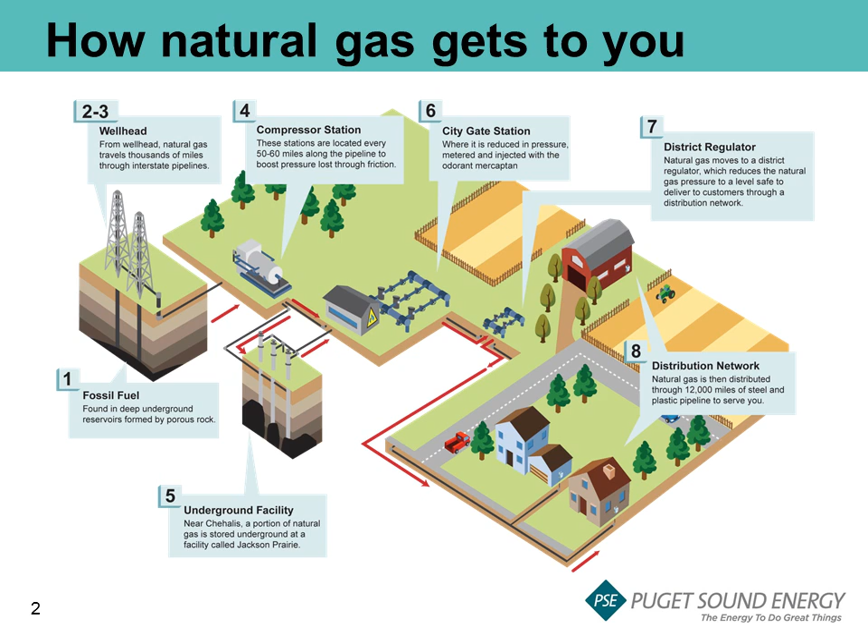You could compare natural gas flowing through the various pipelines to a car traveling down an interstate, exiting to a state highway, turning onto a neighborhood street, and then finally arriving at a house. PSE's natural gas comes from Canada and the Rocky Mountain states and serves more than 750,000 customers in 6 counties.

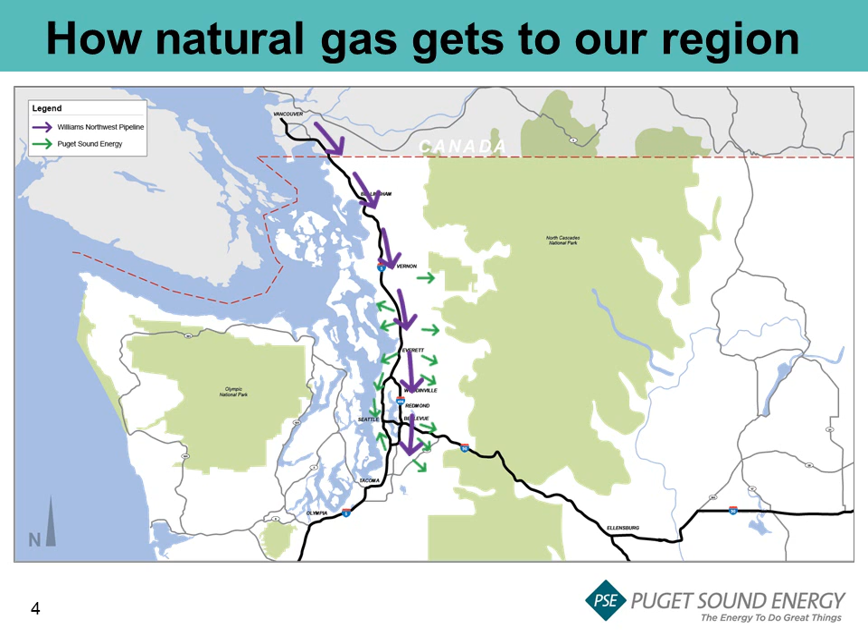For northern King County, Canadian gas goes through Williams Interstate Transmission Pipeline, shown in purple, and interconnects with PSE's system, shown in green. Locally, the Williams Interstate Transmission Pipeline connects into PSE's system near Cottage Lake through a distribution pipeline called the Duvall Lateral. The Duvall Lateral pipeline serves nearly 27,000 residential, commercial, and industrial customers in Woodinville, Bothell, Kenmore, Kirkland, and unincorporated King County. This pipeline helps augment the Seattle distribution pipeline, shown in pink.

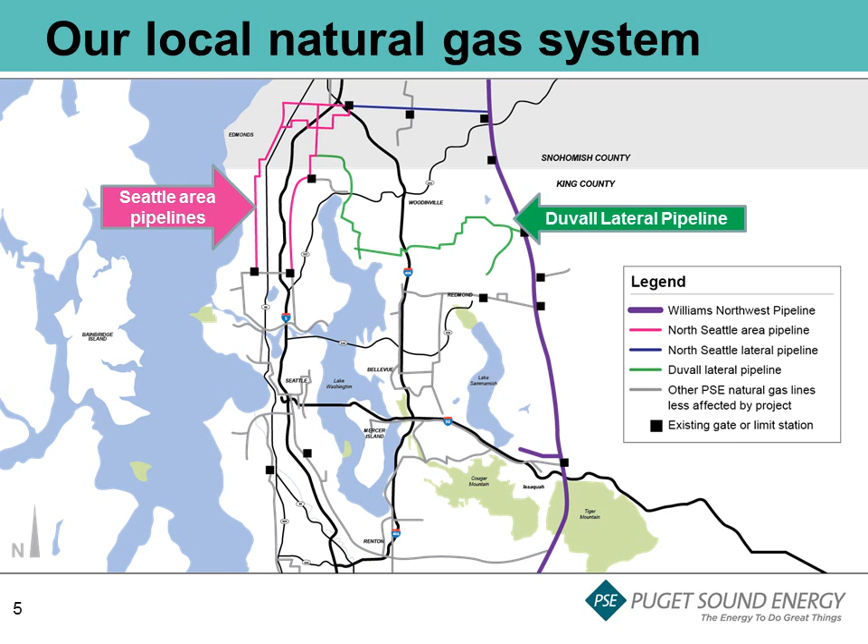Because of the interconnectivity of the natural gas system, these pipelines must work together to ensure adequate operating pressure and reliable service to customers. Our local communities continue to grow, and customers are using more natural gas by converting their appliances from electricity. As demand grows, parts of our natural gas system are reaching their capacity limits, like the Duvall Lateral pipeline. The pipeline size is limiting the amount of gas flowing through it during periods of high demand.

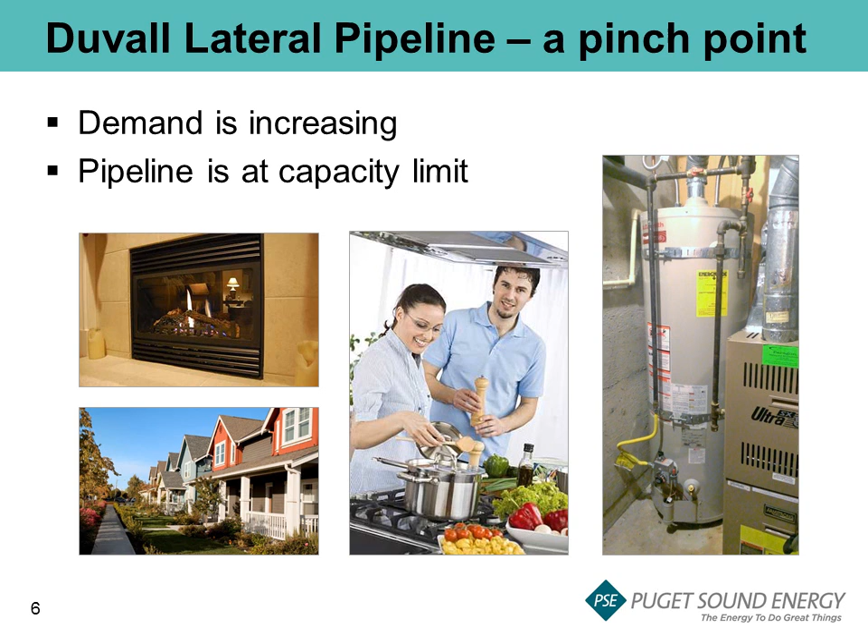During times of cold weather, the capacity limits of the pipeline can affect the natural gas system's ability to supply gas at an adequate pressure to our customers. Let's walk through a series of images that highlight the problem. Today, we can see areas with low pressure issues during cold winter mornings. These areas, shown in orange, are at risk for service disruptions.

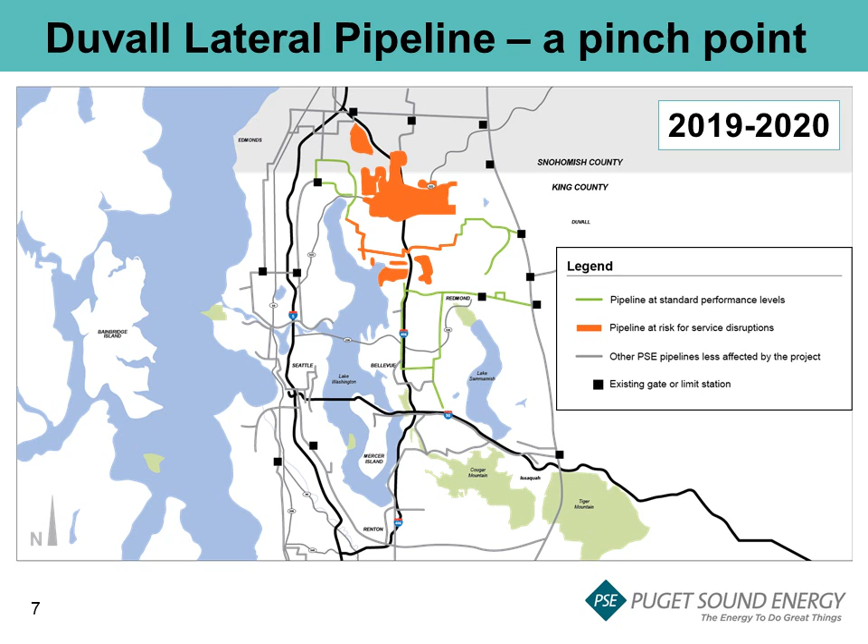If demand grows as predicted, the likelihood of pressure issues and the risk of service disruptions increases over time and at colder temperatures. Right now, PSE can manually address these pressure issues to ensure continued operation, but in the near future, these issues will occur more often and increase the likelihood of service disruptions. Service disruptions mean homes and businesses are without gas service on cold winter days, just when customers need it the most to stay warm. These disruptions are inconvenient and can pose safety issues due to cold temperatures.

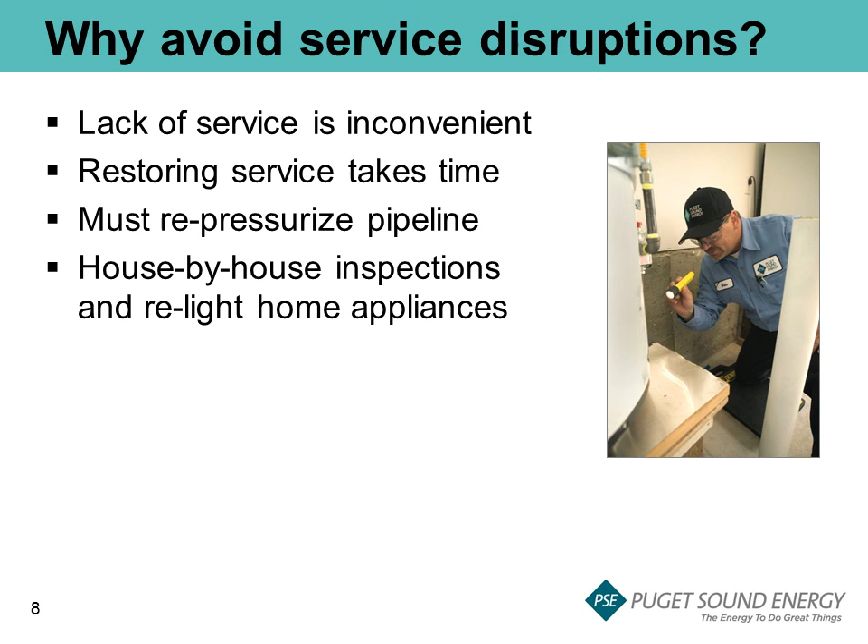Restoring natural gas service is more complex than power outages. Depending on the size of the disruption, it can take hours to multiple days for the pipeline to be safely pressurized and inspected. PSE must then go house by house to turn on individual meters and safely relight natural gas appliances. We are not willing to take the risk of increased service disruptions, so we need to find a way to solve the capacity problem now.

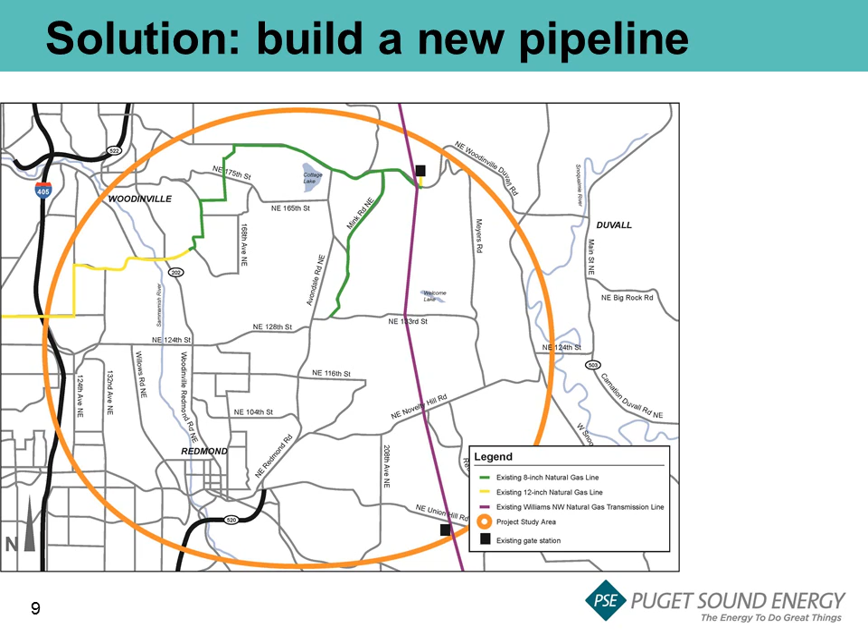To solve this problem, we plan to build a new pipeline to reinforce the Duvall Lateral, ensuring continued service to customers now and well into the future. When considering where to put the new pipeline, we looked at dozens of alternatives within the project study area, shown in orange. We considered siting criteria like community impacts, safety and maintenance requirements, constructability, environmental impacts, and future relocation risks and costs, as well as using existing rights-of-way like roadways and the Seattle Public Utilities Tolt pipeline corridor.

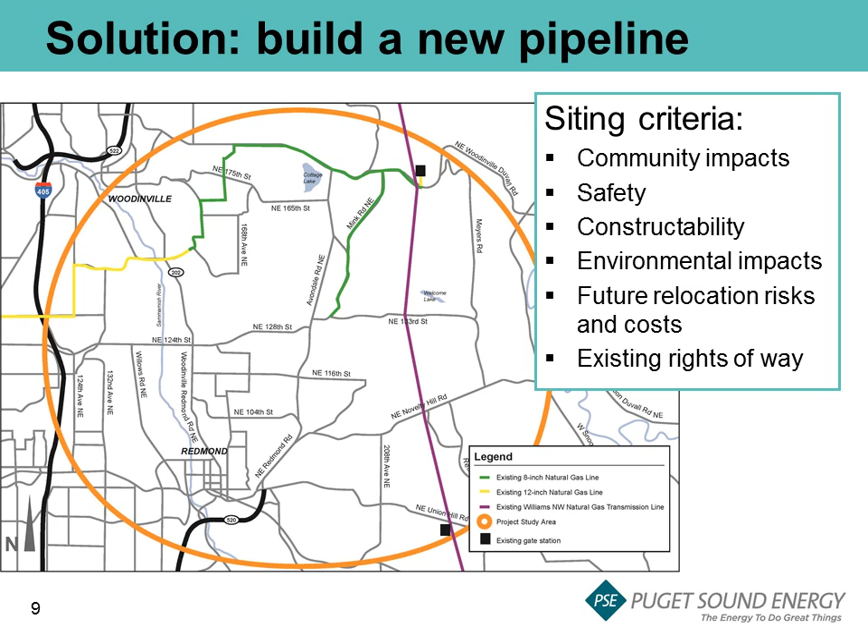After reviewing the criteria, we determined Seattle Public Utilities Tolt corridor was the best match for the project and customer needs. It allows use of an existing corridor, which provides access for inspections and maintenance. The Tolt corridor also reduces community impacts and traffic during construction, since it avoids paved roadways. Lastly, it allows phased construction so we can build out the new pipeline based on future customer demand. Our new Tolt pipeline will be built to reinforce the Duvall Lateral and relieve the pinch point.

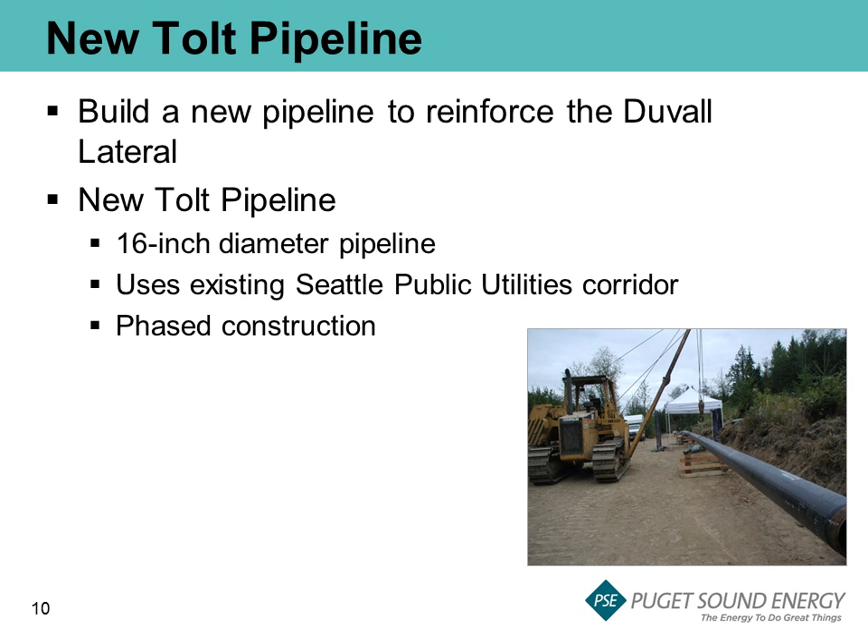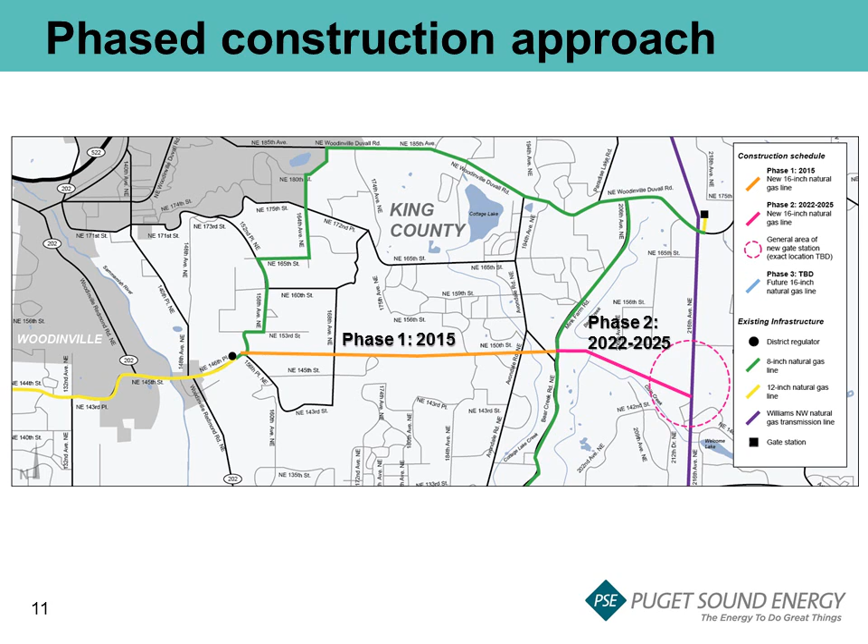Phase 1 of the new Tolt pipeline, shown in orange, follows the existing utility corridor between Mink Farm Road Northeast and 155th Avenue Northeast. To be prepared to meet current growth predictions, we expect to have Phase 1 in service by 2015. Phase 2, shown in pink, extends the pipeline to interconnect with the Williams Interstate Pipeline. We will also build a gate station where natural gas will be metered, reduced in pressure, and mercaptan will be added, the odorant that makes natural gas smell like rotten eggs. Design and permitting will be included with Phase 1, but construction isn't expected to occur until around 2022 to 2025.

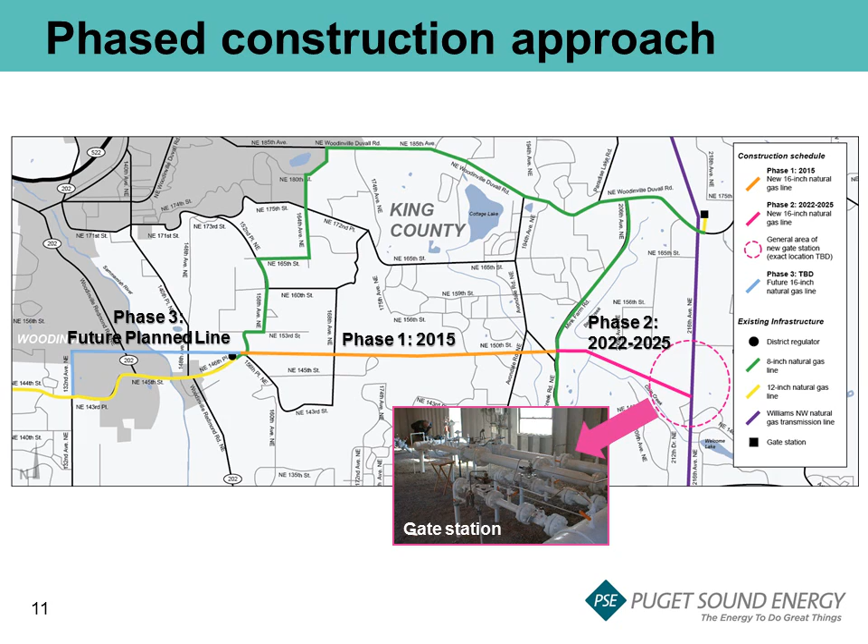Phase 3, shown in blue, is dependent on the area's growth. We estimate this work is approximately 20 years out. Phase 1 consists of about 3 miles of new pipeline. Construction of the new pipeline will be a mix of open trenching and directional drilling. Our goal is to minimize construction impacts to the Tolt corridor and the people who use it. We know the corridor is enjoyed by walkers, cyclists, equestrians, and others, so we plan to keep the majority of it open during construction so it can still be used for recreation. After construction is complete, we will restore the construction zone.

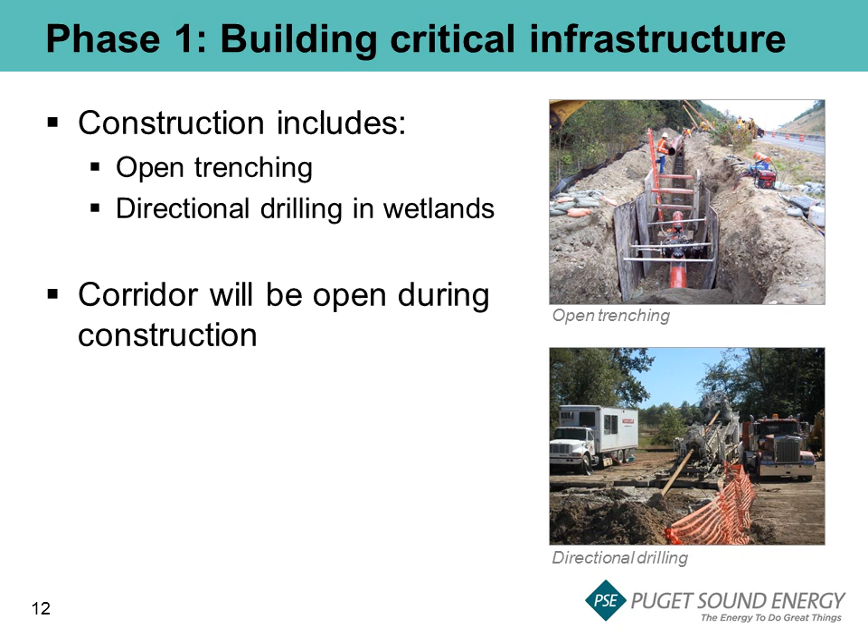This year, we are talking with community members and landowners along the Tolt corridor to answer questions, and we are working on the designs and permitting for Phases 1 and 2 of the new pipeline. Phase 1 construction is expected to begin in summer 2015, and we are committed to keeping neighbors informed of anticipated construction activities. We expect the Phase 1 pipeline will be operating by the end of 2015, just in time for winter use.

PSE's mission is to deliver vital energy to meet customer needs now and in the future. The Tolt Pipeline project is a long-term solution to our natural gas system's capacity and reliability problems. It will help us ensure continued dependable service by implementing a phased construction approach that uses an existing utility corridor and reduces community impacts while also balancing growing customer needs.